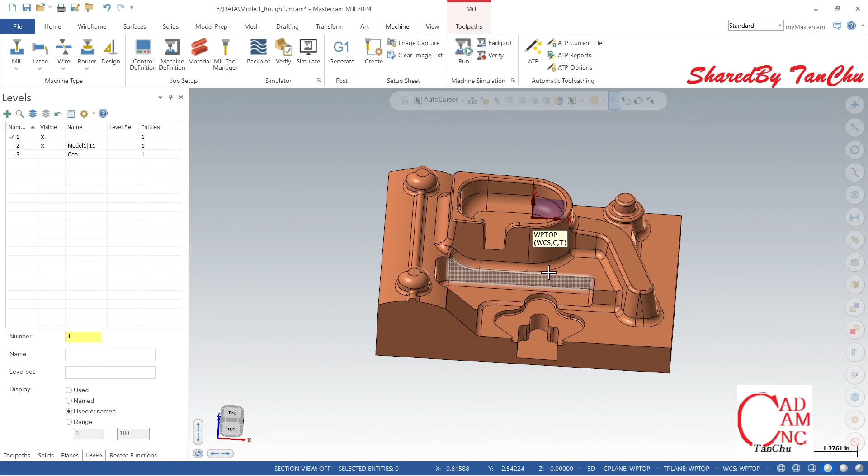In this video we learn how to finish all the surfaces of the top of this 3D model. We have rough and semi-finished for hole on the top, leaving 10 mil on all around surface, and now we need to finish this up.

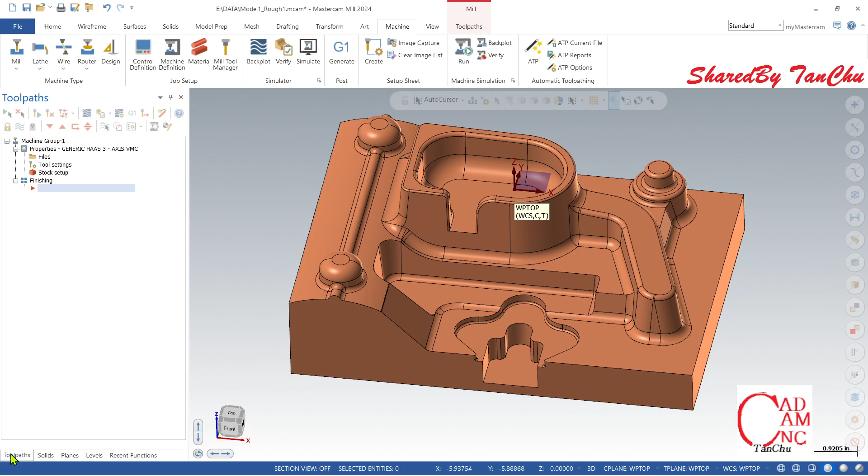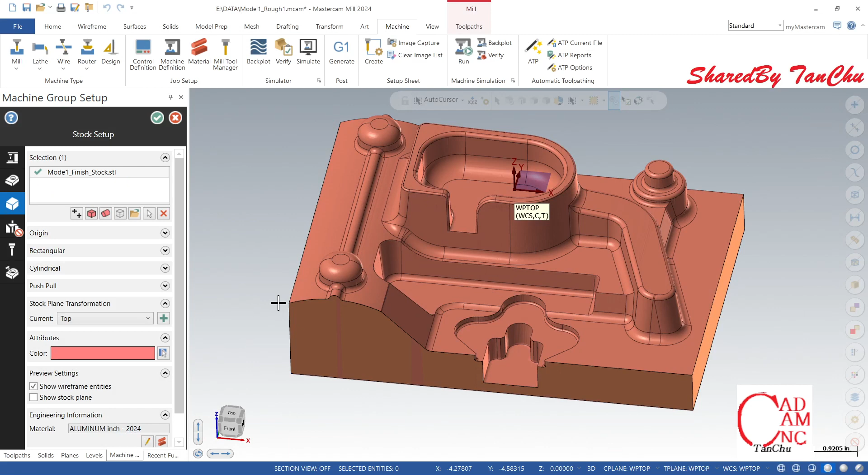The first thing I'm gonna do is load the semi-finished stock. Load it in - this one we saved before as STL. Open it and load it in. This loads already, and we accept it.

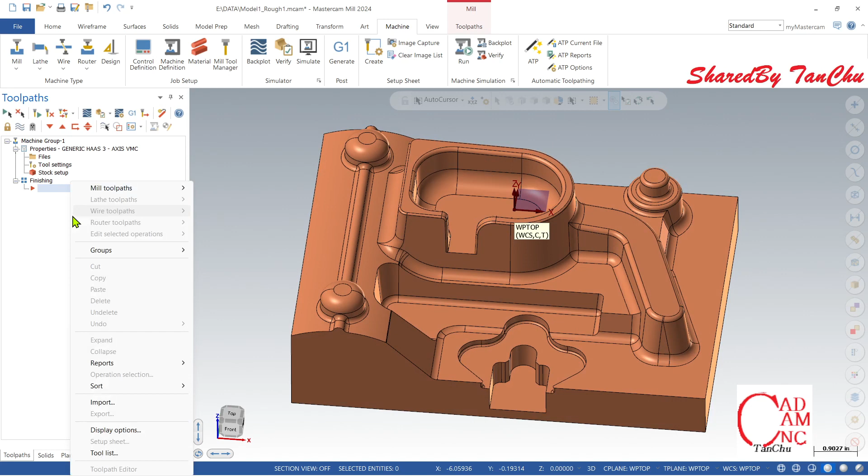We can check the 3D model. The first thing I would like to machine is finish the flat first. We still keep the workpiece top at the center line. Right click and choose surface finish.

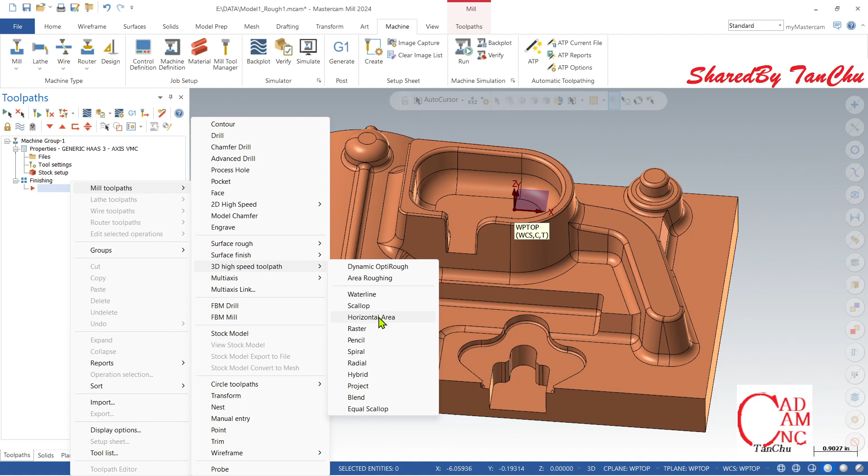Surface finish, 3D high speed toolpath, horizontal area, and it pops up like this.

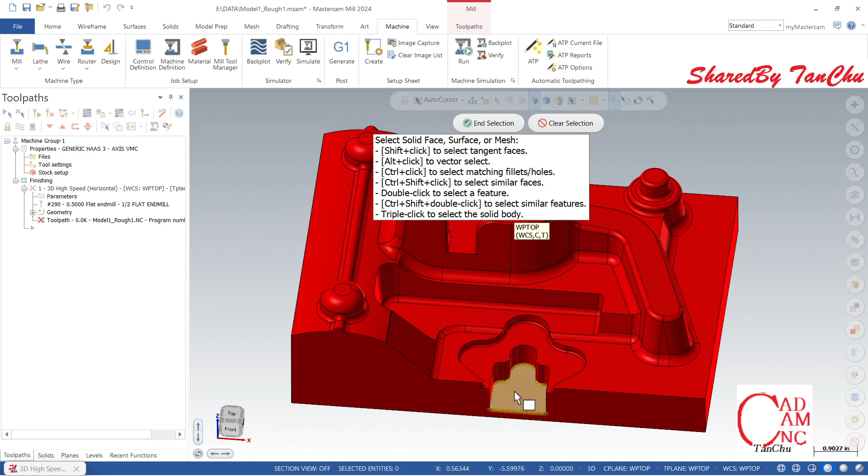I'll check the avoidance all first, and I'll make this 0 0 for finish, and I add which surface I need to finish - all the surface finish flat, all the flat, this flat too, flat, flat. Enter.

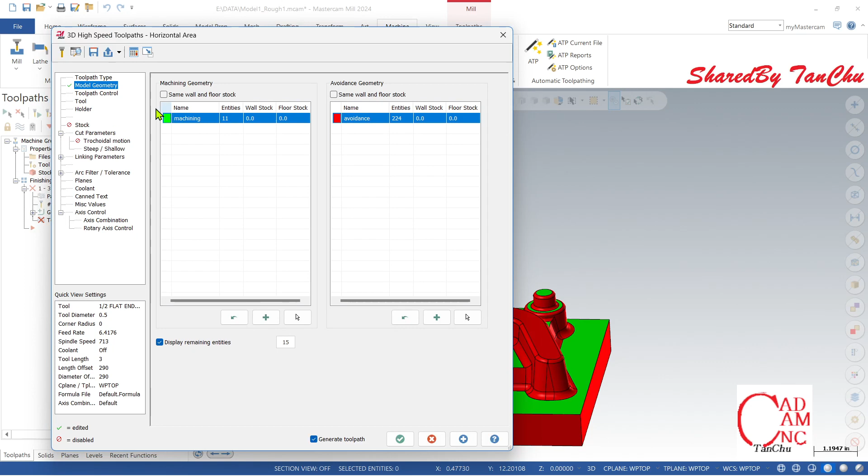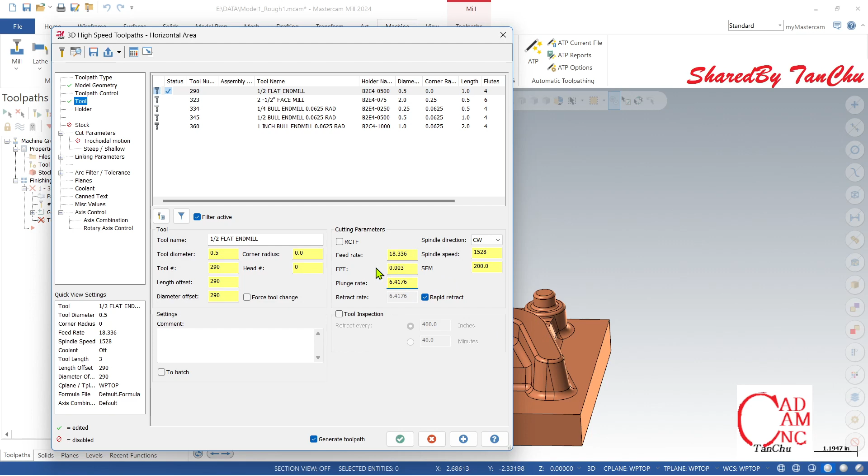The tool, I run the tool a half inch mill, 200 SFM, 0.003 per flute, and holder stick out 3, good, and stock.

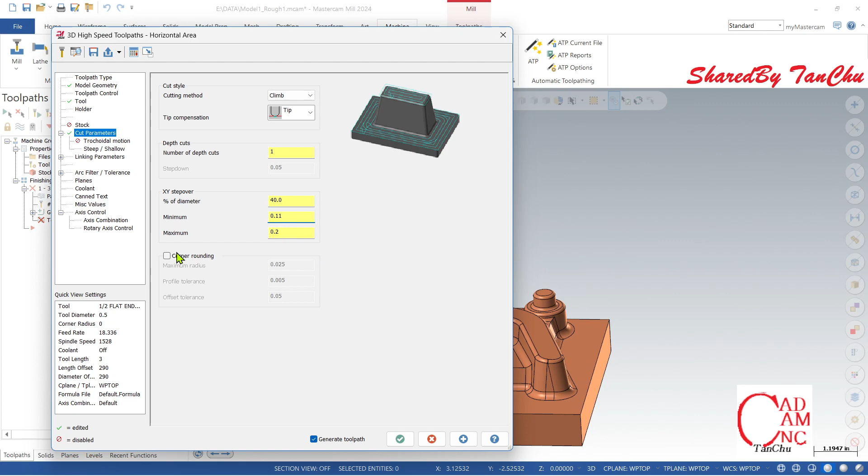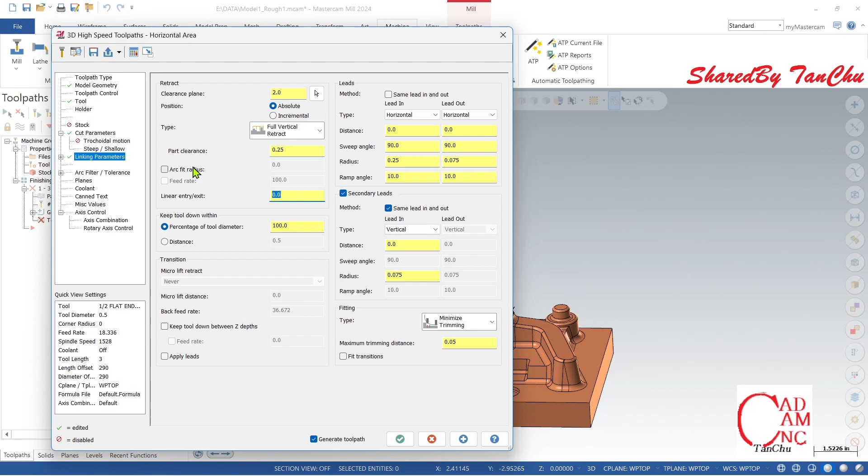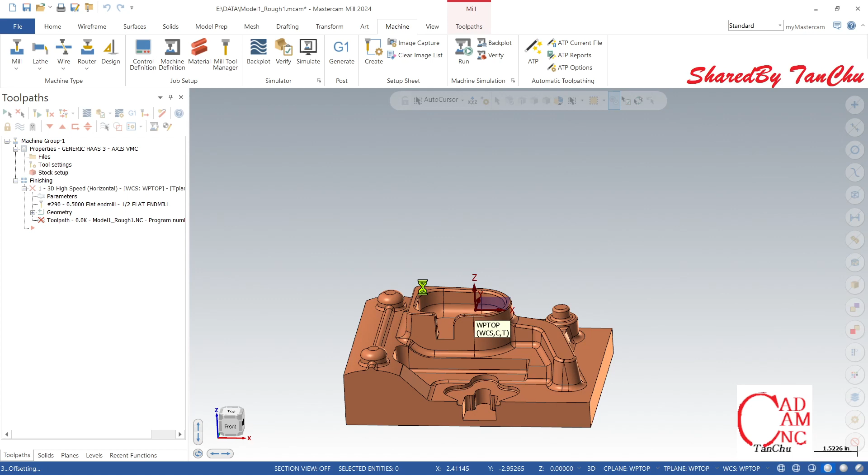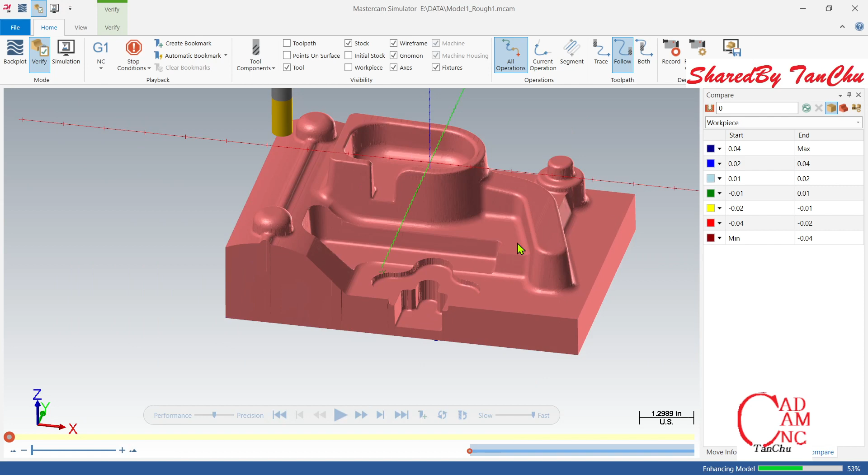Try to verify. Now the stock is semi-finished, it's not a block anymore, and verify it, run it.

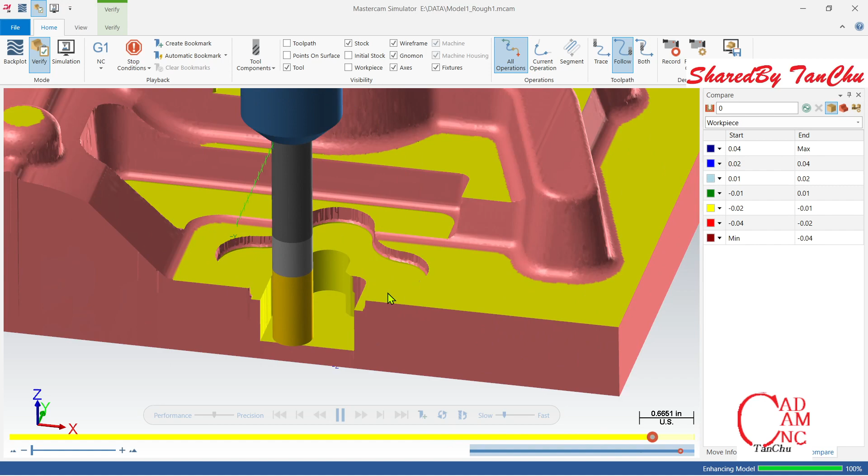This is not cleaned up over here, good. Maybe the tool used is too big. It should be changed to a smaller tool.

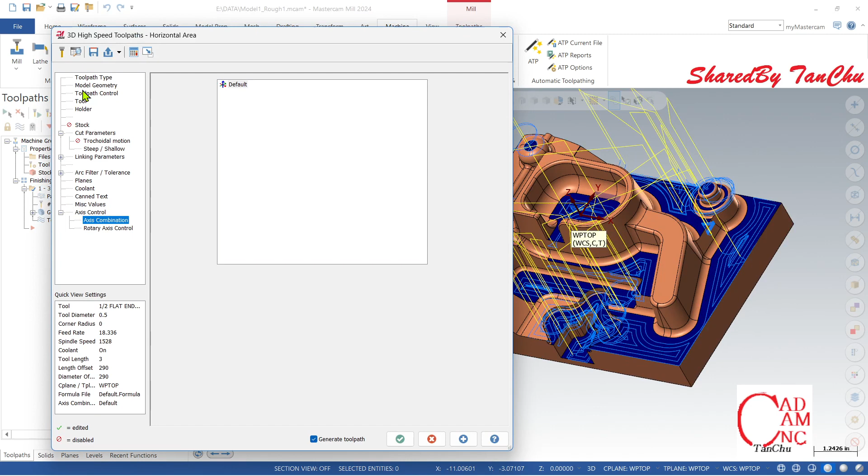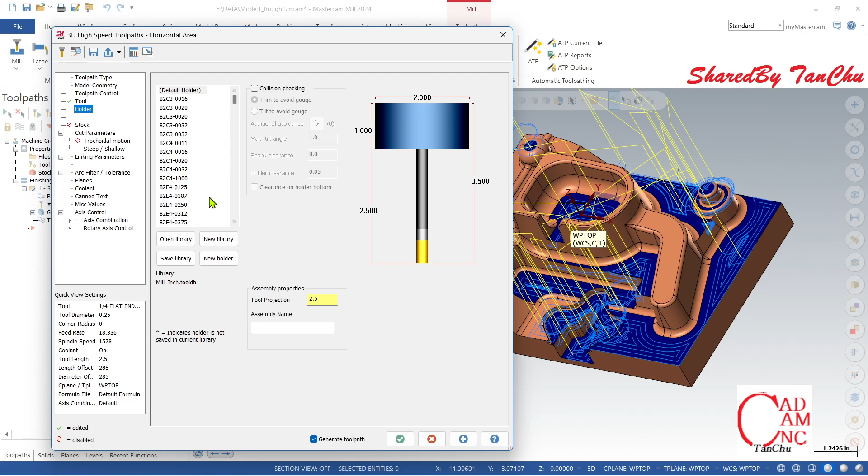The tool over here, I'll run the tool quarter inch flat, and holder projection two and a half. That's okay, and for in, good.

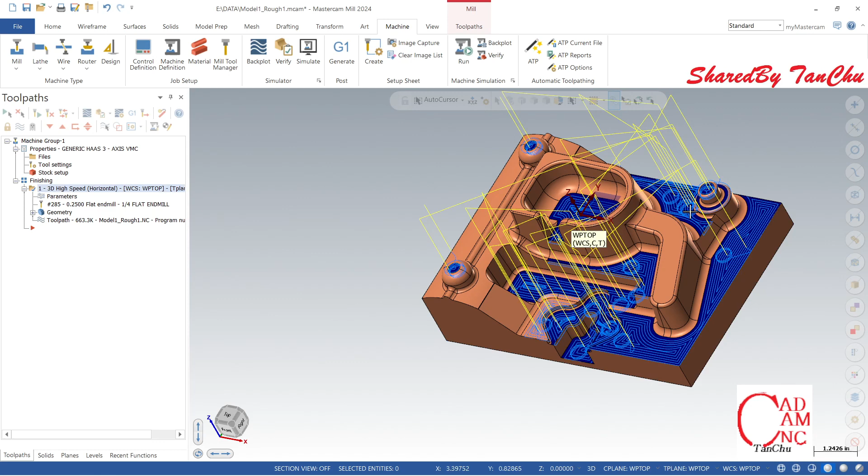Try to regenerate it, and verify again. Try to run it.

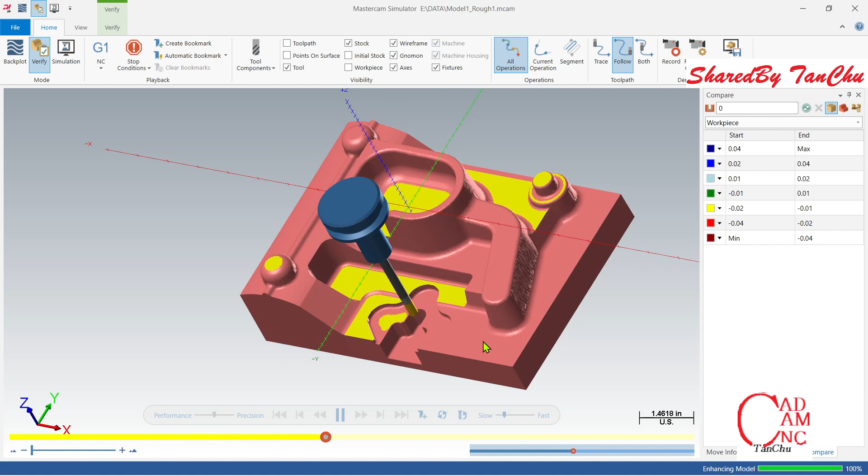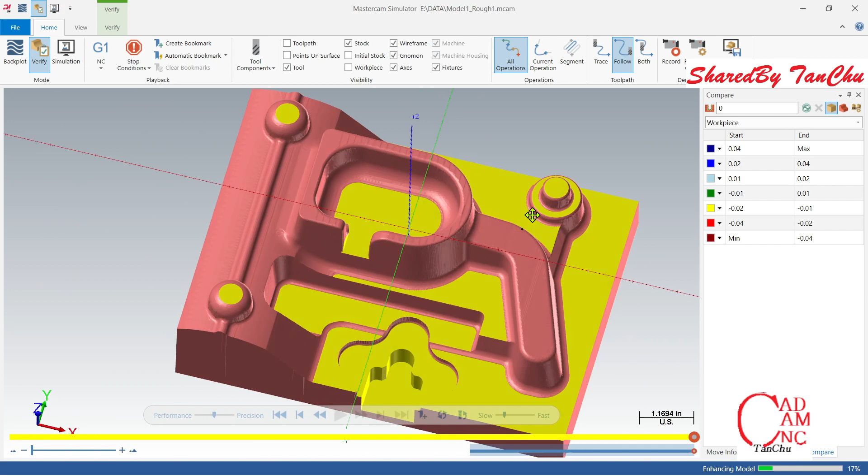Clean up all, and we need to compare over here to see how it finished.

It is too big. I'll check from 10 up, and a little 0.5 up, and this is 0.1 up, and this is 0, and this is 0.5 to 0. This is -10, and compare it.

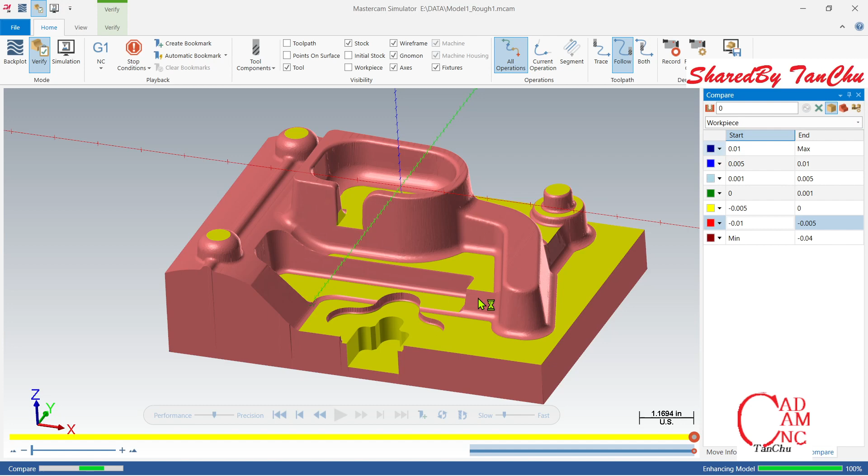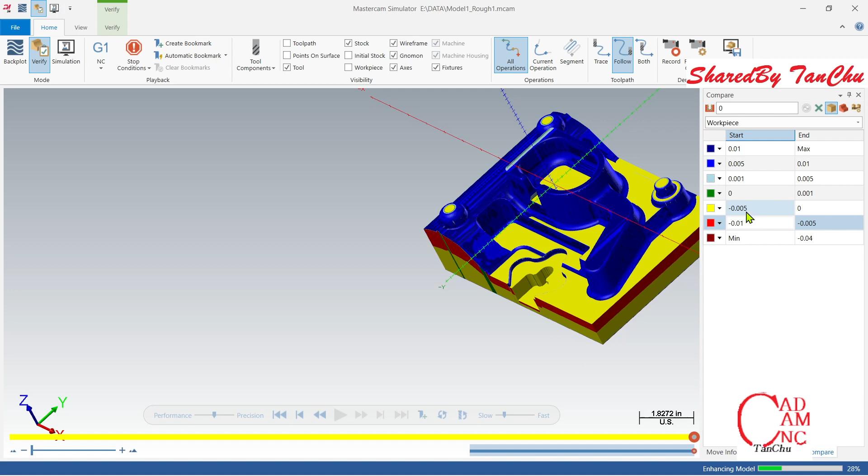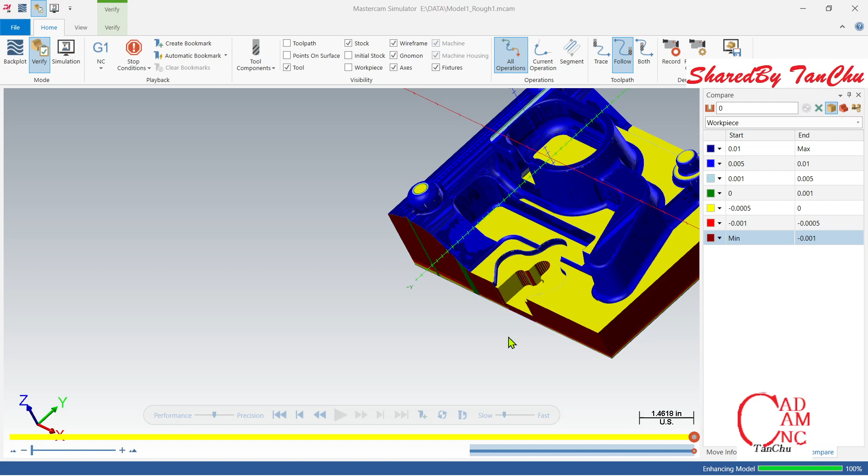Yellow is here from -0.5 to 0. I'll call it good.

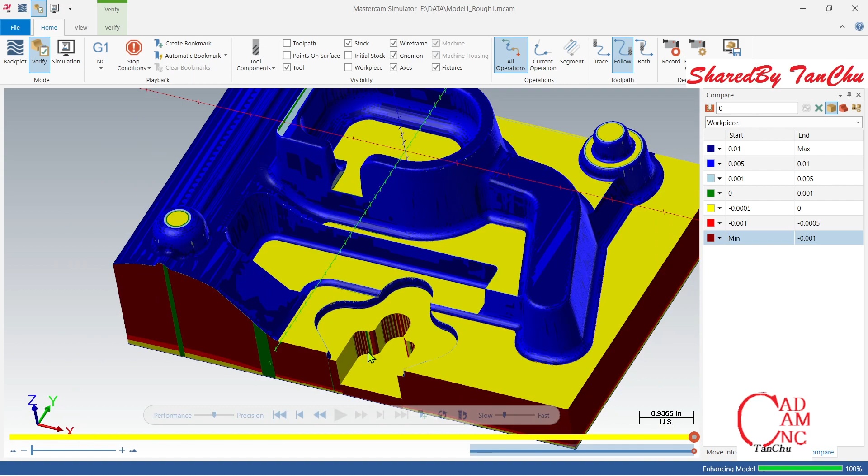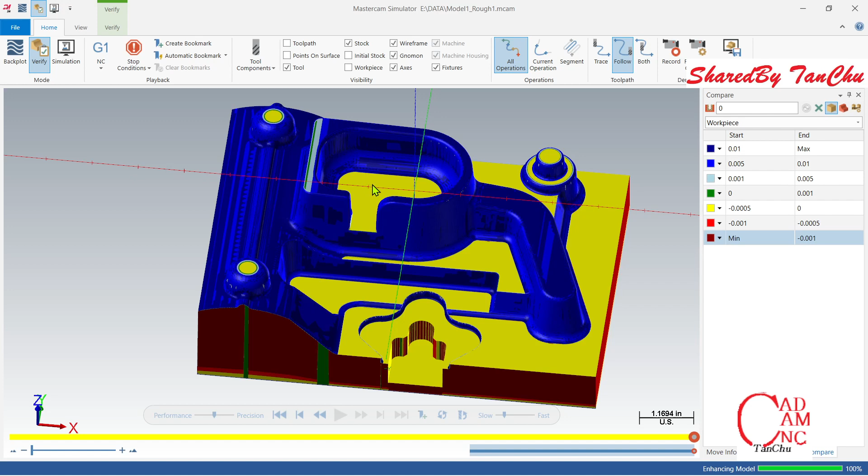Now that's it for the flat area, horizontal area operation.